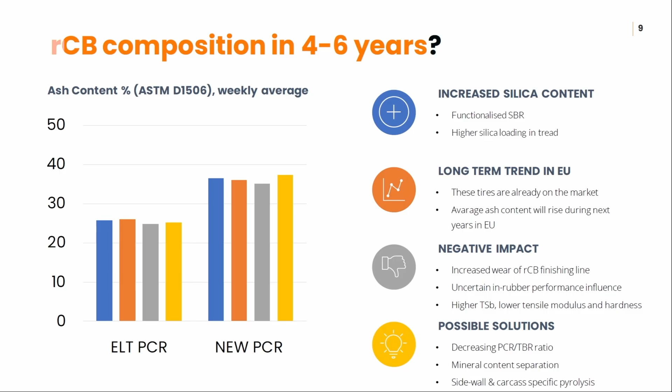And this also influences the rubber performance of recovered carbon black, because right now we are easily in the N660 range, so we are okay to be put in sidewall or inner liner compounding, but not in the tread. But if you have much more silica, it will be difficult for the sidewall to get involved.

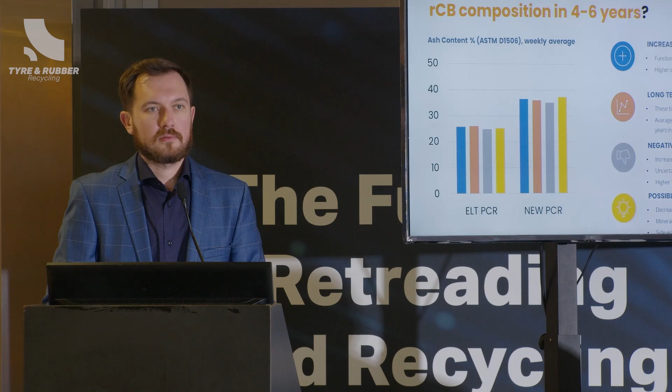So what are the possible solutions? Of course, if you put in more TBRs, there is less silica in the tread, so you could push your pyrolysis with more TBRs, but TBRs should be retreaded. You're all talking about that today, so this is the right way to go with TBRs. Of course, we can try to separate the minerals out of RCB, but this is dangerous and not cost effective. But we chose a different approach.

So we went to sidewall and carcass specific pyrolysis with our partners. We partner with Tyre Recycling Solutions, a Swiss company, which takes the tires, cuts the sidewall off, and then uses their own technology, called TRS Water Pulse, to shave off the tread with water jetting, basically, to micronize it and create a kind of powder. This powder is called TyreXol and can be used directly by tire manufacturers in new treads, maybe also for retreading.

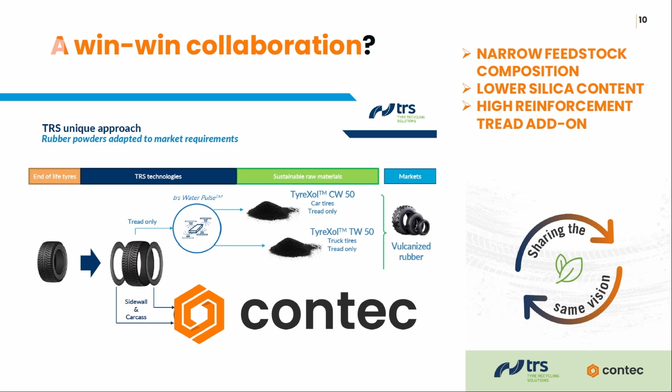I highly encourage you to approach them if you're making compounds for retreading as well. But there is sidewall and carcass left, so we can use it. And we did pyrolysis with very specific feedstock from them, just the pure sidewalls, and we had really great results with resulting RCB with lower silica content, high reinforcement, and really good results.

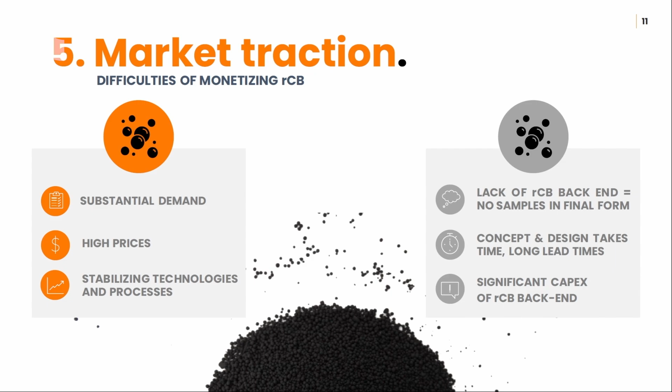What else is needed? Number 5 is market traction, because most small companies have no cash flow for high capex, and if you want to sell recovered carbon black, and you can see carbon black at the lower part of the image, you need to invest a lot in the so-called RCB finishing line.

And this is really difficult, because on one hand you have substantial demand, because every tire manufacturer right now is going to chase you after recovered carbon black, because there's not enough in the market and the prices are high, but on the other side it's really significant capex, and it takes almost 1.5 years to build a proper finishing line, like we have one in Szczecin.

So at the end, point number 6 is sustainable business, because it was extremely difficult this year and the previous year to get financing for this type of industry for scale up, and we need to work together. I believe collaboration is the way to go. So we need economy of scale in chemical recycling.

Plastic pyrolysis is leading the way, because everybody right now from the plastic industry and plastic pyrolysis industry is expecting that the off-takers will pay higher prices just to develop the capacities for the pyrolysis industry.

So there are several things to consider, and we need clear guidelines as well for LCA, because everybody is presenting, like we do for recovered carbon black, that the carbon footprint is much lower, but everybody is calculating this in a different way. So most probably you are also asked what the carbon footprint of a retreaded tire is and how to calculate this. We need really clear guidelines for LCA studies and the carbon footprint, and we are already doing this in a task group in Chemical Recycling Europe, so this is being done.

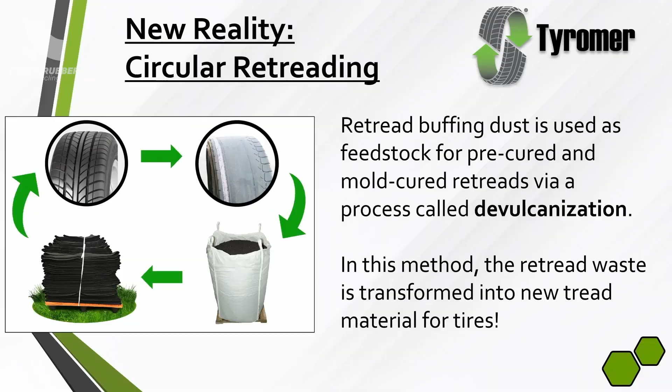Now, what I call circular retreading is basically using the retread buffing dust or the retread waste as feedstock for pre-cure and mold cure retreads. And we do this through our process called devulcanization. So really in this method, we're taking the retread buffing, the retread waste, and turning it right back into new retread material. I'm going to describe the steps. It's quite straightforward in the sense that we don't change anything of the first step of retreading.

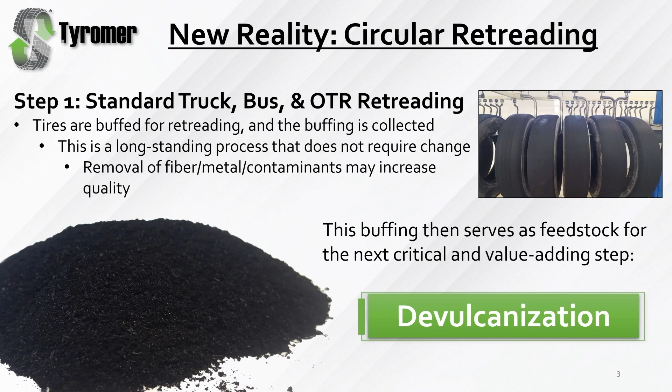So you look at standard truck, bus, OTR retreading. The tires are buffed down, meaning the old tread is removed from the tire for the most part, so a new tread can be glued on or molded on. But we really use this buffing dust as our feedstock. Now, I'd like to make it clear that the devulcanization technology works with a large amount of feedstocks. Basically, any material that's been cured with sulfur, we have the potential to devulcanize. But for this particular presentation, we're talking about retread buffing and, again, circular retreading.

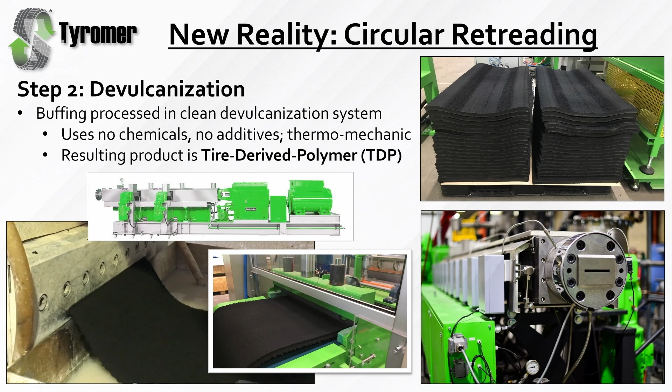So step 2 is really the devulcanization step. So after you have this retread buffing waste, it goes through our clean process of devulcanization. So basically, we're using a twin screw extruder. It's a thermomechanical reaction. We actually do not use any chemicals at all. And so it's just the retread buffing waste that goes into the machine, and it's this, we call it tire-derived polymer, or TDP, that comes out. Again, there's no chemicals used in our process.

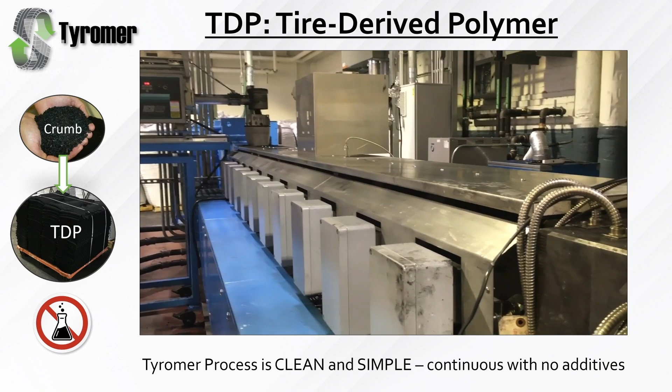There's no additives. Now, this is a really old video. This is a 10-year-old video. You can see the crumb rubber falling into the extruder in the middle there. I like to use this video because it really shows the simplicity of the technology. Like, that was the crumb rubber going in, and this is the devulcanized rubber coming out. And that's the whole manufacturing process right there. It's a really simple process.

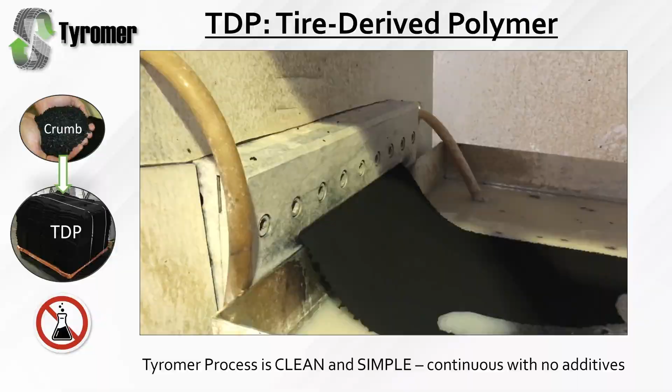Now, this was about 10 years ago. Since then, we've really developed a lot of downstream processing, like automatic packaging, metal detection, weighing and cutting. But the actual devulcanization process, that was it. The crumb rubber goes in, it's a thermomechanical reaction, and this devulcanized rubber is what comes out.

Now, step 3, once we have this devulcanized rubber, what do we do with it? Well, we take it and we mix it into a rubber compound. And so this could be a mold cure, this could be a pre-cured tread. It's also important to note that our material, because it comes from basically the retreaded tires, it inherently contains about 26–27% recycled carbon black. So while we talk about our material being recycled rubber, it's really a recycled rubber compound that contains natural rubber, synthetic rubber, and carbon black.

And so with carbon black as a filler, it's really the vulcanized rubber that gets in the way of reusing that carbon black. And so by devulcanizing the rubber, it makes it a lot easier to mix in. And so again, our material is inherently about 26 or 27% recovered carbon black. Now from there, we mix it into a retread compound. Again, this could be a pre-cured compound, this could be a mold cure. In this case here in this picture, this is a mold cure

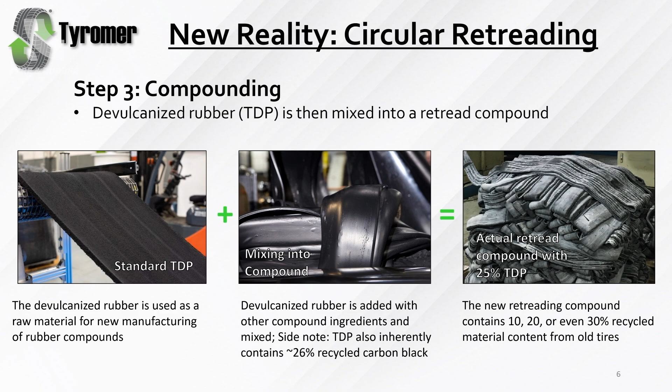compound. And so in terms of the addition level, we look to add maybe 10, 20, or even 30% recycled content into a new retread. It really depends on the application, but still that's the potential here, using 10, 20, or even 30% recycled content in a quality retread that meets the industry standards. And so for the application of it, this is for mold curing. And this was actually the first big application that our TDP was used in Canada.

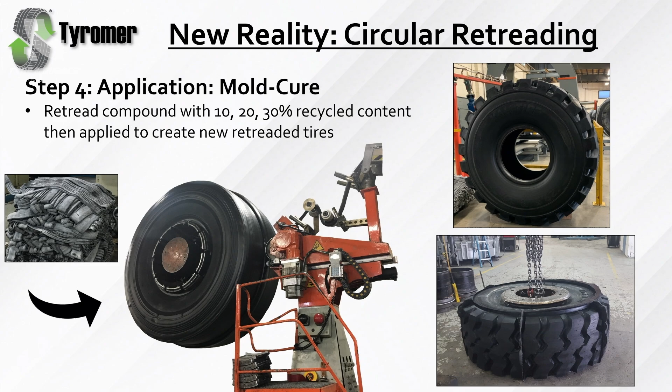And so there's a big company called Kal Tire. They do a lot of mining services. They've been a partner of ours, and they've been using this OTR retread compound for about 6 years now. They started with 18% recycled content, and just this year, they were actually able to increase the recipe to 25% recycled content. So these tires that you see here are newly retreaded OTR tires with 25% recycled content in them. And the recycled content is the rubber compound, basically the rubber and carbon black mixture.

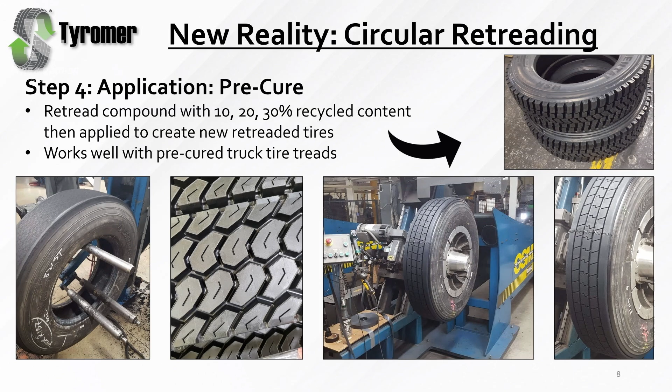Now, we're doing the same thing for pre-cured tread. I'd say the development is maybe just a little bit behind because this is just starting to come out now. But it's the exact same method and process. So basically, you're making this pre-cured compound. Again, 10, 20, 30% recycled compound. But for this application, for a pre-cured truck tire tread, we're looking more at that 15% range as probably the optimal level right now.

As the tires get larger, we seem to be able to add a little bit more recycled content into it. But for a pre-cured truck tread, we should be targeting 15% recycled rubber compound right now, because this is basically what we've been doing the last few years.

Again, I think a lot of the comments that Krzysztof made in the last presentation make a lot of sense, because we too have been working very closely the last few years on quality control, controlling the feedstock, opening up the market. So these concepts are not just related to our technology, but to the tire recycling industry in general. And I think events like this are great to bring more attention to it and to bring the right minds together.

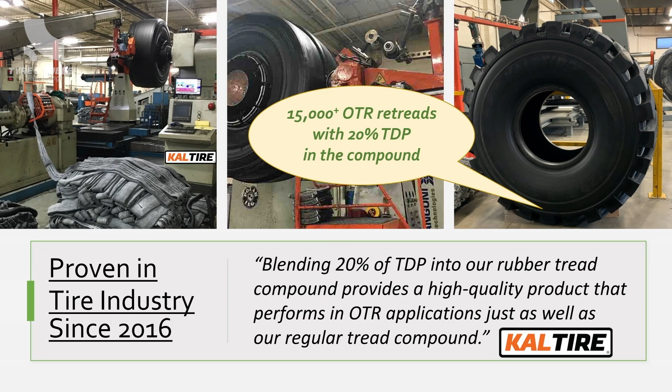Now, again, this is something that we've been doing in Canada since about 2016. And so we can say now over about 15,000 OTR retreads have been made with this compound with 20% recycled material in it. We've quietly been doing this in Canada, but it's been ongoing for about the past 6-7 years now. And so, again, we've passed about 15,000 OTR retreads with about 20% recycled material content.

So a little bit more about this tire-derived polymer. Again, it can really be made from basically any rubber material that's been cured with sulfur. Our most standard is retread buffing. We started with retread buffing because it's very finite. The truck TBR retread buffing specifically is very finite in terms of the composition. It's pretty standard whether you look at the truck tire composition of Europe, North America, even Asia; they're relatively similar. So we liked retread buffing because it gave us a very narrow range to start with.

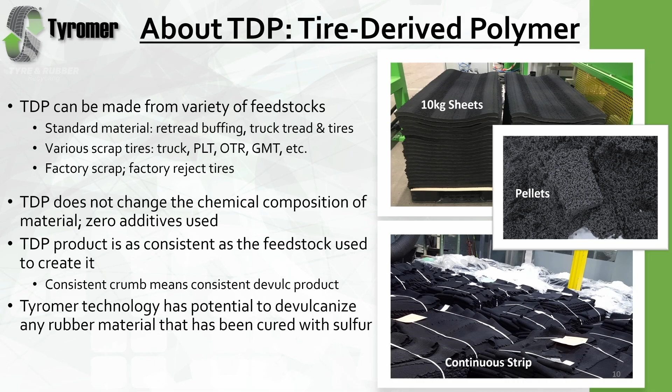From there, we've really standardized whole truck tires. So we have a whole truck tire product. We can also do a whole passenger tire product, but it's a little bit lower quality. So right now, our main sources of feedstock will be: one, the retread buffing dust; two, end-of-life whole truck tires; and three, end-of-life OTR and giant mining tires. There's potentially a great amount of recycled rubber in those big tires.

But we can also do factory scrap, we can do factory reject tires. The technology has the potential to devulcanize other synthetic materials like EPDM. But right now we're really focusing on retreading, and this is actually the longest standing application that we've been into. Now, as Krzysztof was mentioning earlier, it is very important to control the feedstock. To be able to supply the tire industry and the tier 1 manufacturers, you really need to have your QA and QC in order. So we have ISO 9001:2015, ISO 14001, and these are really just the start.

Now, benefits of using tire-derived polymer: we think it really significantly reduces the CO2 footprint. If you make TDP instead of making a new tire compound, you will save about 90% of the energy. The devulcanization process is quite simple, as you saw. It has no chemicals or additives added, and the energy efficient process uses about 300 kilowatt hours per metric ton produced. TDP can basically always be sold at a discount compared to natural rubber or carbon black, so it definitely will reduce costs.

We like it because we prefer to produce this locally. The whole point of our technology is to license it and get it out there to where it's needed. If we need this in Italy, we want to put a facility in Italy. If we need this in Australia, we want to put a facility in Australia. The point is to use local material and have a local source. You can use those local tires as a local source of rubber. So in places like the United States and Europe, where we do not grow rubber, we can still have a source that is largely natural rubber coming from these end-of-life tires.

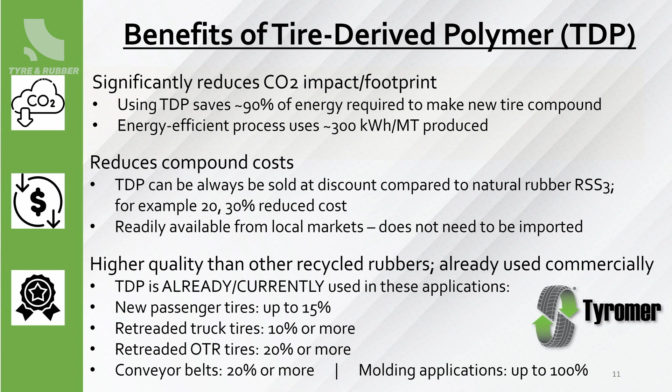And as I said, this TDP is currently already being used in these applications. It is being used in new passenger tires right now. It's being used in retreaded truck tires, pre-cured. It is being used in OTR retreads as mold cure. And it's also being used in some conveyor belt applications. So it's really a versatile material with a lot of potential, and right now we're just trying to get the word out and let people know that this is possible.

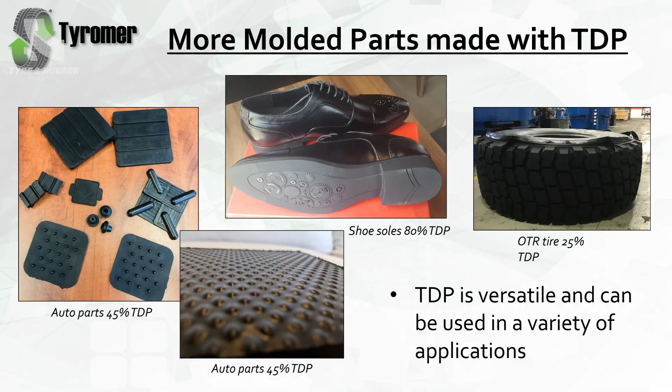And so just a little bit about Tyromer Inc. As David said, we're a Canadian company founded in Waterloo, Ontario, about an hour west of Toronto. We are a licensing company, so we want to license the technology. We don't want to be setting up and running all these facilities ourselves. We want to capitalize on the strengths of partners and keep our own technical expertise. We're really a technology company, so we like to continue to develop the technology, find ways to increase the properties, and make the process more stable.

Right now we have two facilities in Canada. We have a facility in Arnhem in the Netherlands. There's a facility coming to Chennai, India early next year, and there's a few more in the planning stages. So hopefully we have something in the United States and an additional one in Europe coming soon.

For this audience, I thought it was important to mention what people can do to help right now. And again, I think a lot of the points Krzysztof made were really spot on in terms of the support that we're looking for. And so, for individuals, we want the consumers to start requesting recycled material from the tire manufacturers. That will eventually start to change the way that they work. If their customers are demanding it, then eventually they will change. So that's something that can happen. So individuals, consumers can do this.

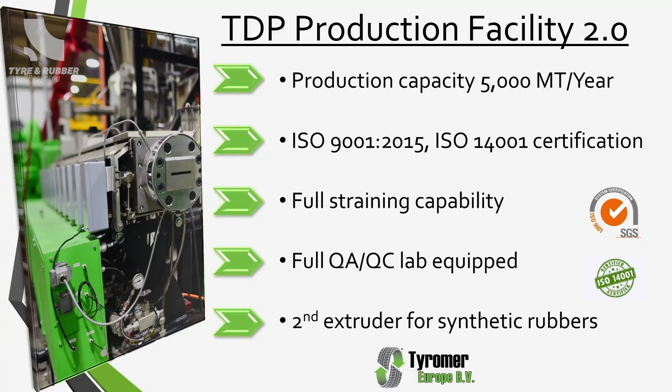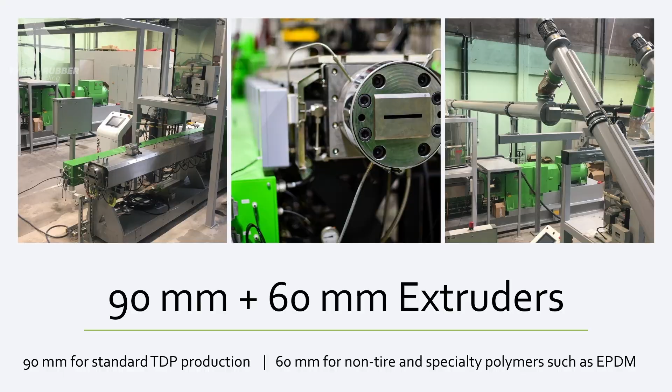We do have 2 ISO certifications. We have a full straining capability, which is basically forcing the hot rubber through a fine mesh screen to remove any contaminants. We have metal detection as well. Full QA QC lab. We actually have 2 extruders here. So we have our main extruder, the 90, for our standard tire material. We have a smaller extruder, the 60 millimeter, which is good for synthetics, specifically things like EPDM. Again, we have this full straining capability.

This is really important. I don't want to brush past this point. This is really important for quality in the tire industry. So basically, as you go through the crumbing process or as you get the retread buffing dust, there will be a little bit of contamination, whether it be some metal or wood or stones. There's going to be something in it. So we force the hot rubber through a very fine mesh screen to remove any of those contaminations. This is a really important point for breaking into the mainstream tire industry and tier 1 manufacturers.

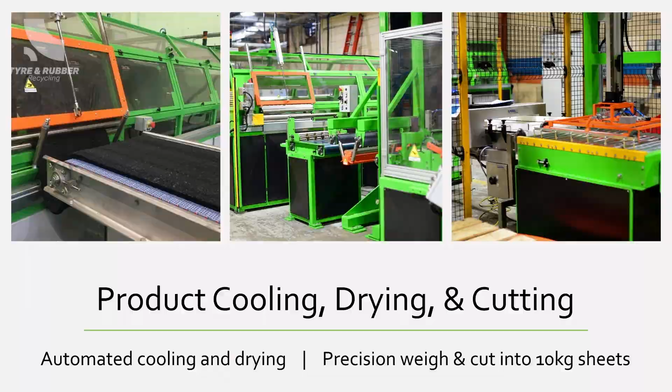So while we are doing this in all our operations now, we believe that any recycled rubber going forward is going to need to have some kind of straining mechanism or some kind of quality standard such as this straining. So we have automatic cooling, drying, and cutting. So basically it'll go through a metal detector. It'll weigh out exactly a 10 kilo sheet plus or minus a couple of percent, and then it'll automatically stack the material. We check for metal. This is very important. So there's metal checks at the beginning and magnets through the system, but this is one very final check before we stack the material.

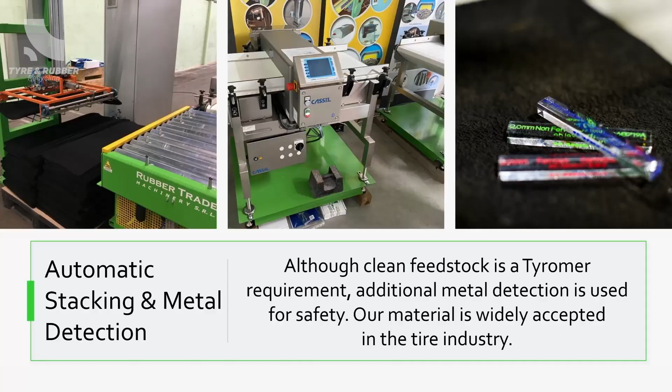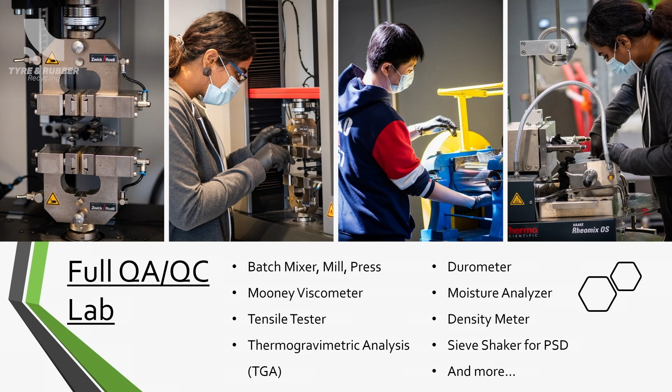We check it for metal one last time. Again, quality and the tire industry go hand in hand, and so this is something that we've had to spend a lot of time on in the last few years. Again, full QA and QC lab. So like any other product, if you order from us, it comes with a certificate of analysis. We can agree on whatever specifications we want together, but we have the full lab to provide it as well.

And so in conclusion here, really, this concept of circular retreading, it's not just a concept. This is actually happening right now. We're doing this right now, and we feel like we can do this a lot more. I think the support in Europe is particularly good for these kind of activities. Retreading can really make a difference. We've seen that, and now this takes it a step further by using the retread's own waste to go back right into these retreads.

And so again, as a licensor of technology, we would love to continue to discuss with partners. So if you have a need for material, if you're interested to learn more, please come and talk to me. Thank you.

Thank you very much, John. Much appreciated. Has anybody got any questions for John? Please. Yeah? Yep. Sure. Okay. Thank you. Yeah. Hi. Good afternoon, John.

What is the approximate amount of investment that's required to set up one of your factories? And what is the volume of production required to reach break-even? So our standard facility, our standard machine, would be about 5,000 metric tons a year. And, give or take, depending on what you need for downstream, I'd say your price is around 3 million USD. Again, I can discuss specifics with you, but that's a good ballpark to use. Welcome.

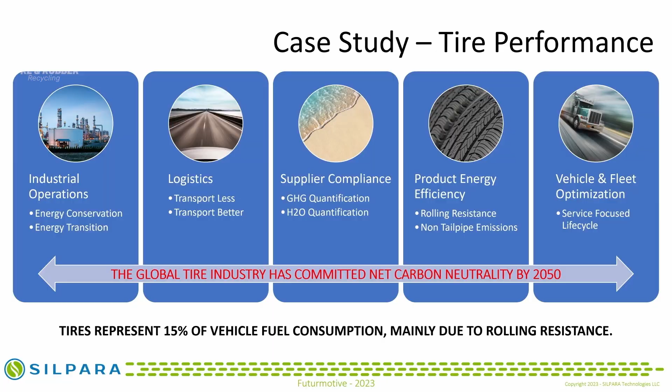The industrial operations are one part of it, the logistics, supplier compliance, but product energy efficiency with the non-tailpipe emissions, as well as through the rolling resistance. Those are the keys. So hopefully we all know the magic triangle. We used the magic quadrangle. The magic quadrangle for us is to expand that envelope from 1 to 1+. And to do that at a rate that is going to be just as affordable as the product that you have today, if not get some value for that product based on the fact that you have a better performance.

So we know in our particular case, we're trying to mix silica with natural rubber. That's been probably the hardest technical barrier for truck and bus tires achieving next level abrasion and rolling resistance performance. I think that could be agreed upon. At least 98% of the folks that we've spoken to in the industry have told us that that is going to be their biggest issue.

So what we're trying to do is get silica and natural rubber to play well together. And in order to do that, what we've done is we've created a drop-in process. It does not require any type of reactor to do. It is mixed basically at the source of the natural rubber in the plantation, and requires much less water. John's going to talk about this, but it requires much less water to produce.

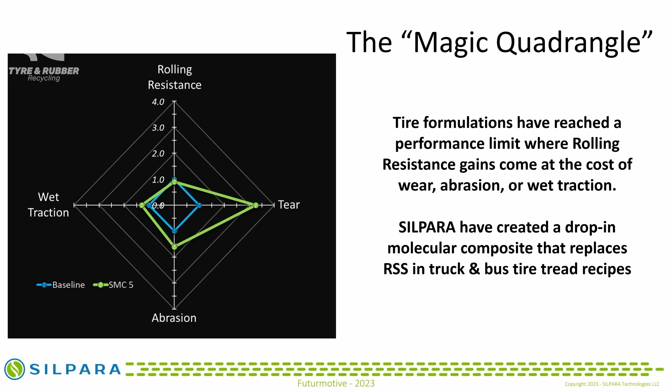And then as far as the product performance is concerned, in certain formulations, we're at parity with rolling resistance. Some formulations were a little bit higher in rolling resistance, up to maybe 20–25%. We're going after the abrasion resistance, which is going to increase the wear component, and our hot tear numbers are looking very, very good. And then as we focus on wet traction, we want to make sure we're at parity. We're not giving anything up to the customer.

So this is the last slide I will talk to, and I will turn it over to John. But from an overall savings perspective, what we're expecting to get and get paid for, we're not going to get paid for it the traditional way. We're going to get paid for it through performance. Our solution provides a lot of innovation when it comes to the problem that we've gone out to focus on. And you can look at the numbers there. It's a gigantic opportunity for the industry to go after. Looking at it from front to back in the ecosystem has been our approach.

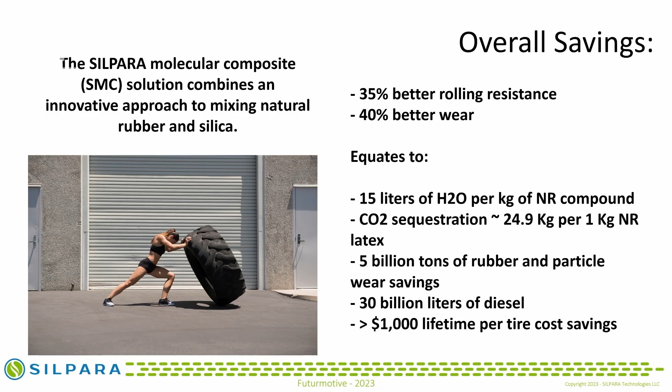John's going to talk a little bit about the savings that we're looking at and where we're going from an environmental perspective. But hopefully at the end of the day, what you've taken away here is that as an industry, we've got to innovate. We can't greenwash. We've got to go after real problems and solve them with real technology. I thank you for your time. I'll turn it over to John.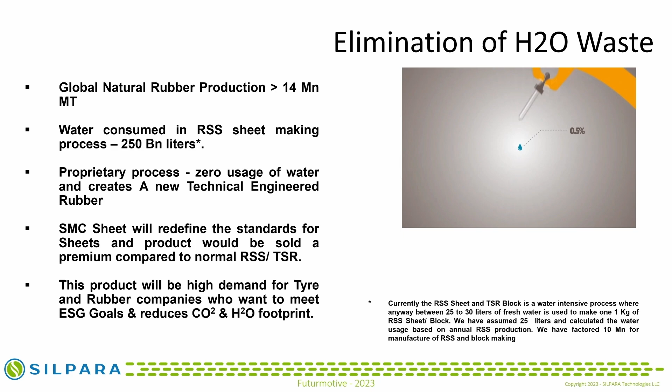Water. It's one of our most precious resources, but our water supplies are limited. 97.5% of the Earth's water is salty, and only 2.5% is fresh water. But over 2/3 of this fresh water is locked in the polar ice caps and glaciers. This leaves only 0.5% in our lakes, rivers and groundwater for agricultural, industrial and personal use.

But due to pollution, the quality of this water is under threat. According to the World Health Organization, only 0.007% of the world's total water supply is safe for consumption. And this minuscule amount needs to be shared by the more than 7 billion people on the planet. And this water is not distributed evenly throughout the world.

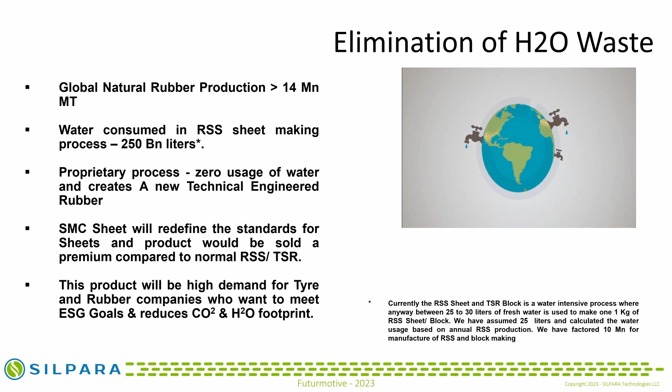1.2 billion people live in areas of water scarcity in places such as southwestern United States, India, Spain, North Africa, Australia, and northern China. At the same time, demand for water is increasing. Over the last 100 years, global population has tripled and water consumption has increased sixfold. But our total water supply has remained unchanged. More people are now using a lot more of the same limited amount of water.

So I just wanted to give you an idea as to if we happen to use the low rolling resistant compound, what could we save? So I just took a small country called Sri Lanka, and they have a very small distance to travel, a truck population of under 500,000, and if we just assume half of them would be eligible to put this in place, at 4% saving, we are looking to save about $50 million.

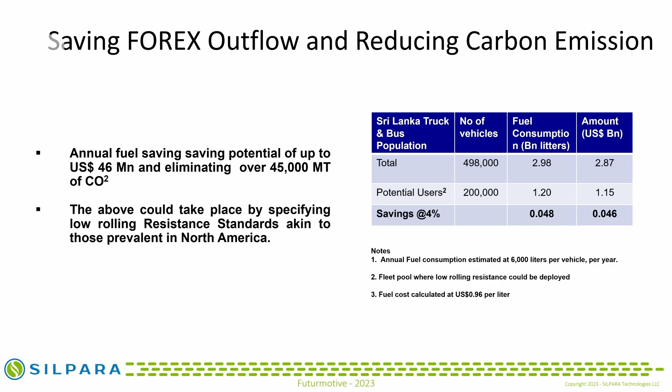Now, translate that into Europe. So these are things where you can actually measure. We had a gentleman talk about how we can do tire data measurement. This is very easy. You can actually measure the carbon footprint that you're going to save, the water footprint. It's going to be a game changer.

I think the question I want to leave with the audience at this point of time is, are we ready to modify or recreate rolling resistance standards across the world? Because that will start reducing tailpipe emissions. For instance, the EU is talking about microplastics and infill bans. That's very nice, but honestly, is that going to make a real impact? No. These are areas where they should be focusing on.

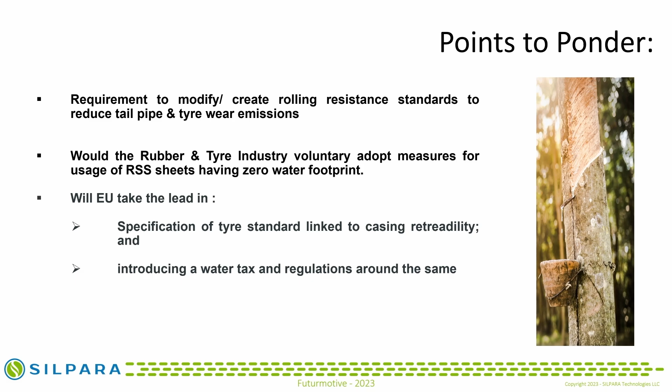Second is, from the rubber and tire industry. While we can say 2030, 2050, I can tell you by the time things move on, they will make it 2100 and say that's when we're going to be sustainable. They'll start pushing that. Will they voluntarily adopt these standards?

And will the EU as such take the lead in saying, can we have specifications for tire standards that are linked to casing retreadability, so that we actually move away from single-use tires, and introduce a water tax in addition to a carbon tax and put regulations around that? Then you're going to have more teeth behind the regulations. That's it. Thank you all for patiently listening.